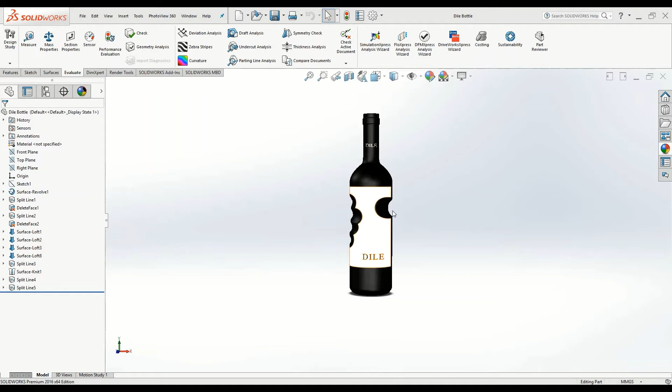Hello everybody, in this video I'm going to go through the design of this quite interesting wine bottle. Apparently it's called the Dile wine bottle, I'm not sure exactly how to pronounce it, but I came across this in a Facebook group called just SolidWorks Facebook group, and the person posted a picture of the wine bottle and asked how you make the grooves in it. So I didn't see anybody respond with a basic tutorial, so I'll quickly go through it and how you would

create it. So the first step is to just Google the bottle and get a good image. An image like this, for example, would be a good blueprint to start. So you can just right click and save this image to your computer. So then in SolidWorks, I've obviously modeled this already, but I'll go through step by step so you understand the process. So you'll start a new sketch on any plane.

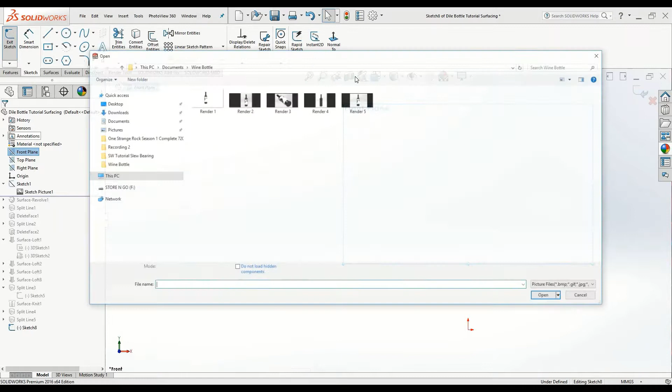And then inside this sketch, you will import an image of the wine bottle. So to do that, I'll just show you quickly. Front plane sketch. So go to Tools, and then Sketch Tools, and Sketch Picture. And then you can bring in the image that you saved to your computer of the wine bottle, and you can scale it and whatnot.

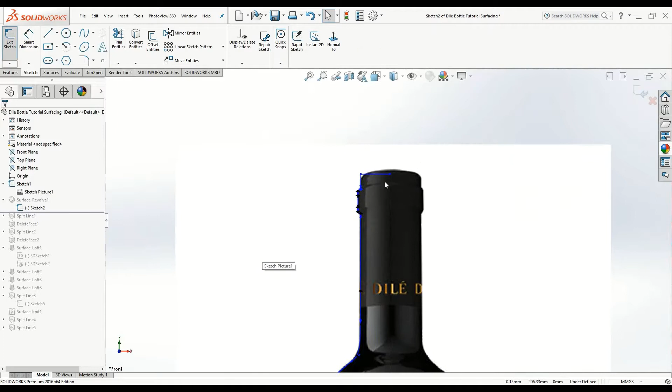So once that step is done, you'll have the image of the bottle in SolidWorks, so it's just a flat two-dimensional image. And the first step I'm going to do is a surface revolve. So I'm going to create a new sketch, and here I've outlined the edge of the bottle on half the edge. And it's important for you to note, I'll just quickly go through that step. So I'll sketch on the same plane that the picture is on.

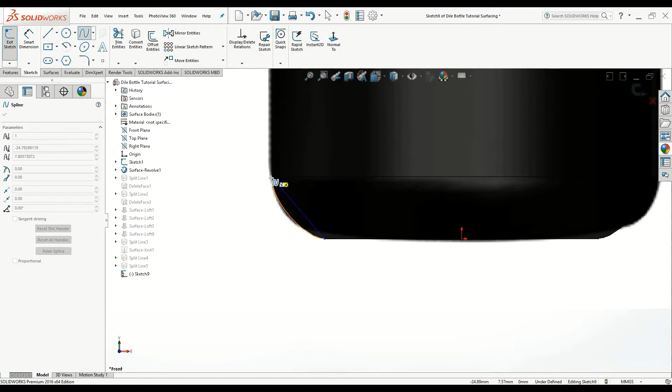And I'm just going to try to use mostly straight lines, but then obviously when we have curved points, we can't use a straight line, so we want to use a spline. So with splines, just click once at the start point, and then once at the end point, and right click and hit select to exit the spline options. And then when you click on the spline, you can see these little arrows that appear.

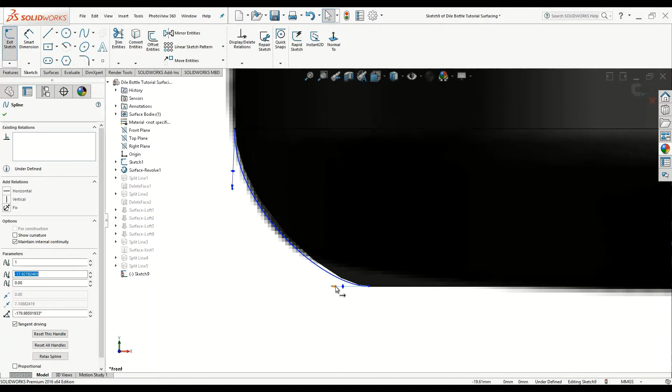So these arrows can be adjusted, not only in terms of angle, but also amplitude. So I'm just going to adjust these arrows to give me the best match with the blueprint. Another point worth mentioning is that I can click these arrows and hit horizontal, or likewise I can hit vertical. And what this means is that the tangency between this spline and this curve is 100% smooth now. So when this surface is revolved, it's going to be a smooth surface with smooth transitions. There's going to be no sharp points.

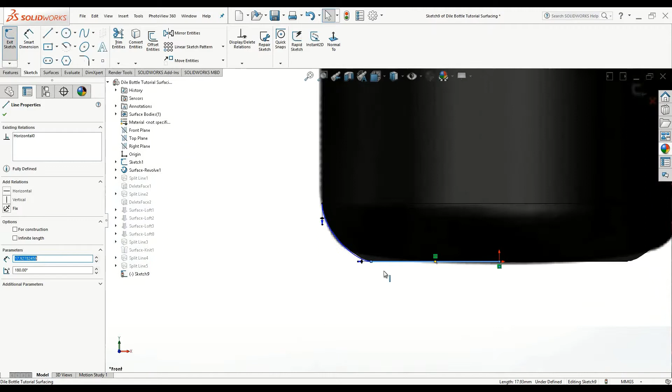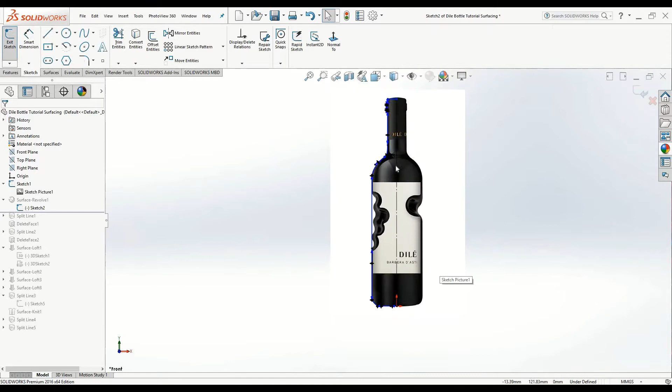So this technique of drawing a spline with 2 points and then manipulating the spline handles is quite important in the surfacing that's going to come later on. So I'll just exit that sketch and quickly delete it. So as you can see with this sketch, I did that whole process going all the way up the bottle, and then I did a surface revolve. So we've got a three-dimensional flat surface of the whole bottle now.

So I'll just quickly state that there is no one perfect way of modeling this bottle because it's an organic shape with advanced surfaces. There's multiple different approaches. I'm just doing a quick approach. I'll explain why it's not 100% perfect and what you would have to do to get it to be a better model. So my approach was to cut out the finger groove sections.

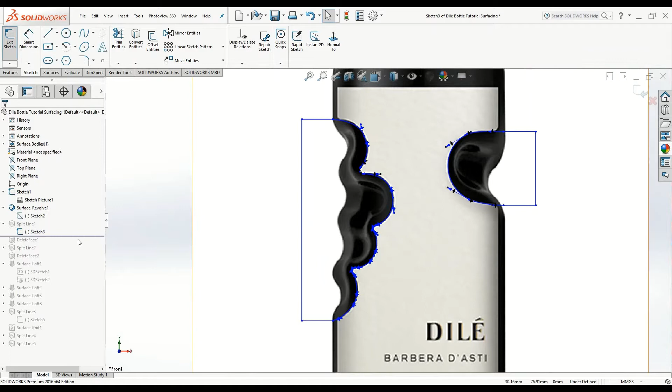So what I did is I hid the surface revolve that I just did, and then I started a new sketch. And what I did here was trace the groove sections where the fingers would sit on the bottle. And then from there, I did that using a split line command. So I'll just quickly show you again how I would do that. So do a sketch on the front plane.

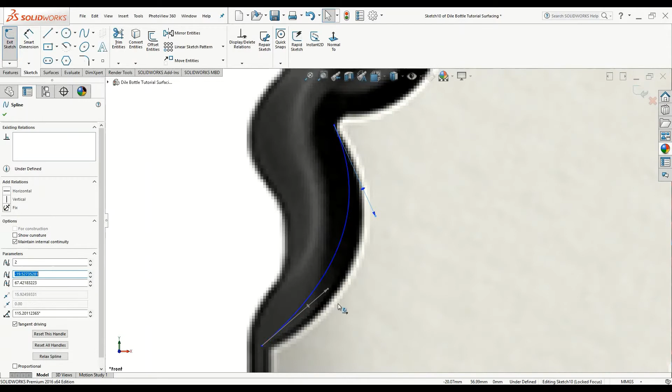I'll draw some splines, manipulate the handles so they match the curvature of the blueprint of the bottle. And I did this essentially the whole way around the bottle, starting up here. I'm not going to do this now because it's going to take too long. I'll just delete that quickly. So once I'm happy with that surface, that sketch, I can go into curves and hit split line.

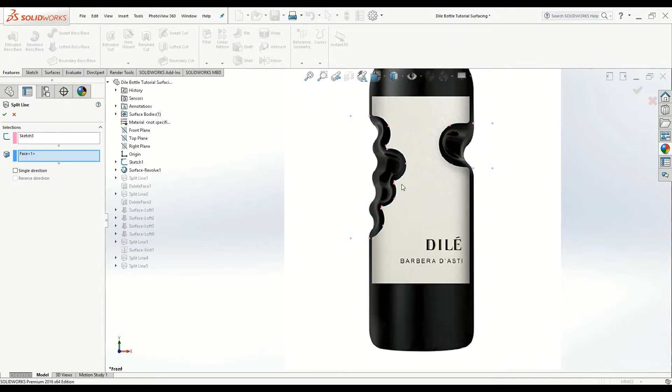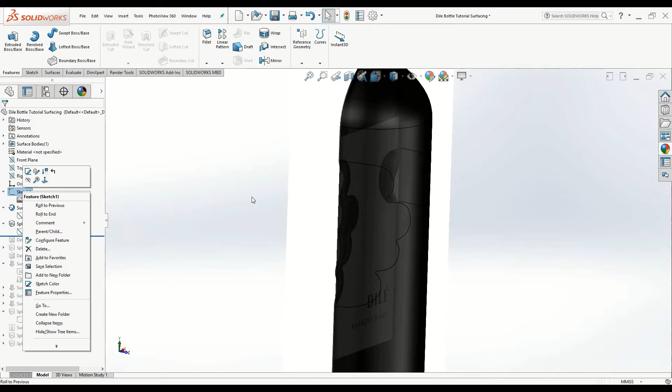The split line feature is going to project the curve I just drew onto the three-dimensional surface. I have that hidden at the moment, so I'll just go back and unhide it. In these processes, you quite often have to hide a step, whether that's part of the model or the image you're working with, just so you have a better view of what you're trying to do.

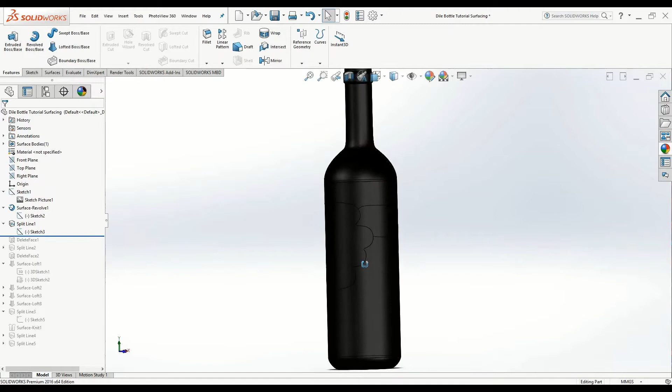Going back into the split line feature, there's the sketch I drew, and I'm projecting that onto the revolved surface of the bottle. I'm just going to hide the image, and when I hit OK, we can see the bottle has been split into multiple different surfaces.

Then I can use the Delete Face command, which will be in the surfacing toolbar. By the way, if you don't have access to this surfacing toolbar, go into Tools and then Customize, and you should see all the ribbon bars become available.

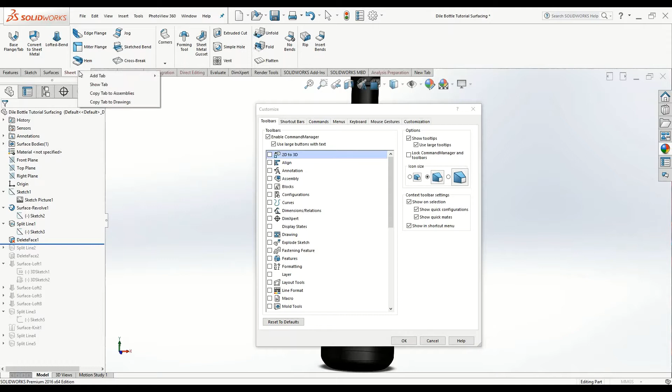For me, sheet metal, weldment, and mold tools become available. If I wanted the sheet metal ribbon to stay, I'd right click it and say Show tab, and now when I exit, sheet metal is available. If I want to get rid of it, go into Customize, Sheet Metal, Hide tab. For some people, the surfaces or render tools may not be visible by default, so you might have to do that step.

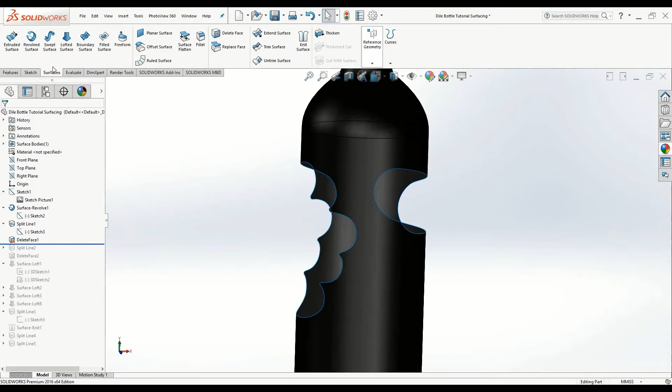What I've done now is use the Delete Face tool on the split line I did earlier. The Delete Face tool is under the Surface toolbar, up here. I'll quickly show you how to do this.

I've done my split line, so SolidWorks now recognizes this as its own section. I'll do Delete Face and simply select the areas I want to cut away. I'm just going to say delete, by itself, because you could do delete and patch, which tries to patch the area with a new flat surface, but I just want to delete these surfaces. Now we can see I've got this interesting shape that's not quite complete.

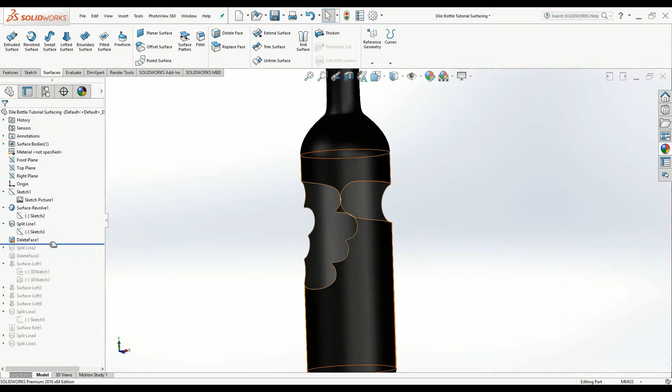The plan in my mind when modeling this was to cut away these sections and then resurface the finger grooves. I also couldn't find a back image of the bottle, so I couldn't find what it looked like on the back. Essentially I just assumed that the area between the thumb and the index finger wrapped around the bottle. That may not be correct, but it's just what I had to assume.

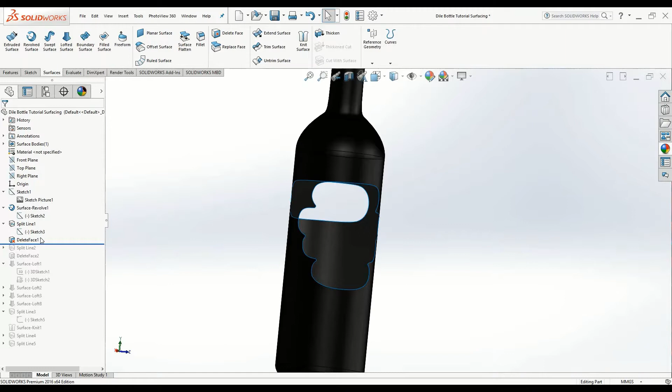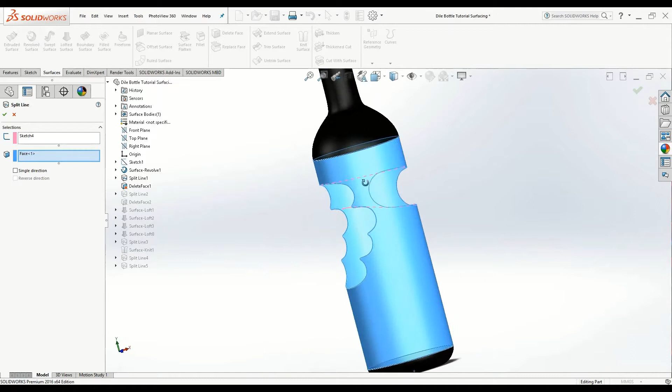So I did another split line sketch and projected that onto the back of the bottle. One point to note is that when you do a split line, by default it will generally project in both directions, forwards and backwards, but I just want it to project in a single direction on the back, so that it only separates the surface into its own segment on the back, because the front of the bottle we want to remain unchanged.

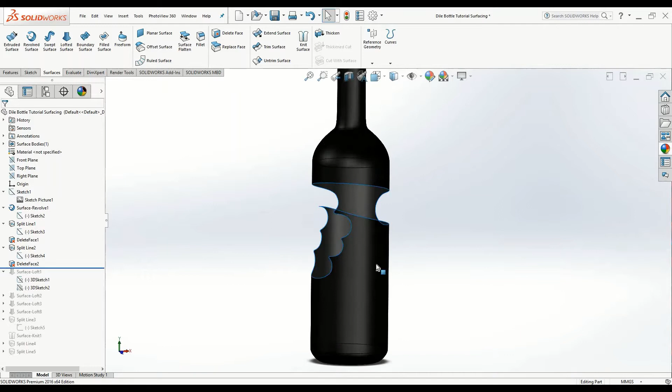Then I simply use the Delete Face tool again to get rid of that section. Now we're at a point where we can start doing our own surfacing to create the grooves in the bottle. I'm not going to go through every step, but I'll show you how to do one and then we'll go from there.

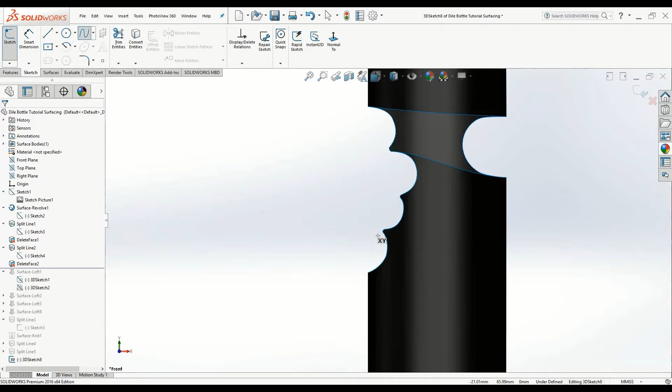If I go into sketch and hit this arrow, I can select the 3D sketch option. I want to use a spline again because I'm going to be drawing curves, not straight lines, and I want to manipulate the curvature with the spline handles. With the spline selected, I'm just going to select a point here, on the bottle, and a point here. Right click, hit select to exit that.

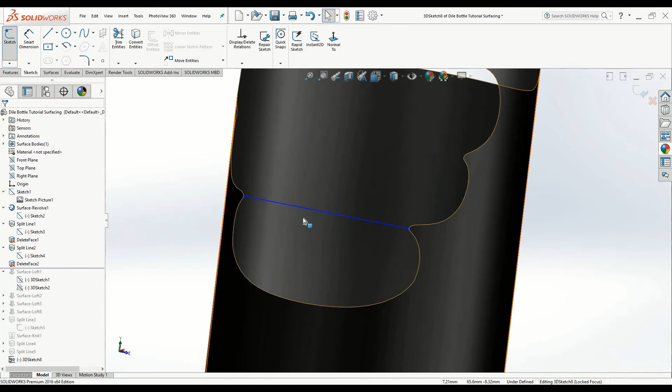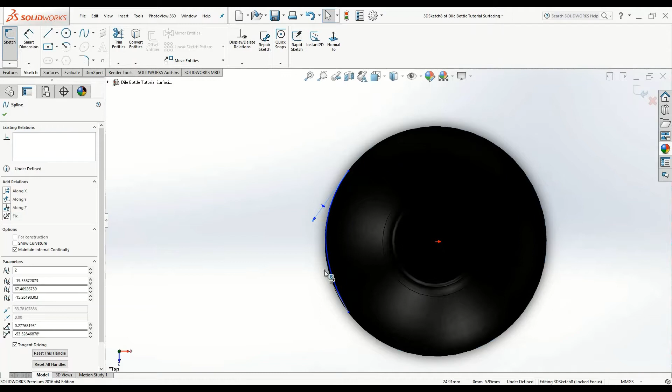So now I have this section here, this kind of loop, which is going to be the smaller subsection surface that I'm going to create. I want to select the spline, and we're going to alternate between our isometric views, front view, side view, top view. In this case I'm going to the top view, and I want this to match essentially the cylindrical shape of the bottle.

Here you just have to try, think, and visualize a bit, and I'm actually going to go back and make the initial blueprint of the bottle visible again. What I'm doing here is trying to create the boundary of the bottle at this point. I'm going to manipulate these spline handles so that this boundary section I'm drawing is as close to the real thing as possible, and in this case this looks quite good.

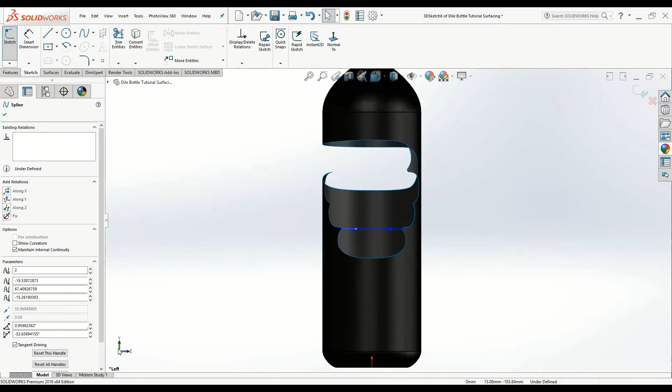So I actually don't have a side view of the bottle. If I wanted to be more accurate, I could try to find a side view, but it's quite alright to just model with one view of this bottle.

It's not the most complicated shape. So here I'm going to press OK to select that, and I'm just going to hide this sketch because it can get in the way when I'm working. So what I want to do here is exit this sketch, because it's good to try keep everything as modular as possible - one spline per sketch.

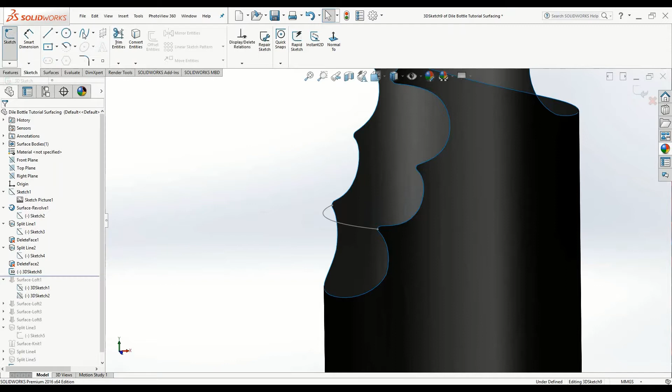I'm going to do another three-dimensional sketch because I want to create a surface between this edge and this edge, but I need to give it some guide curve to follow.

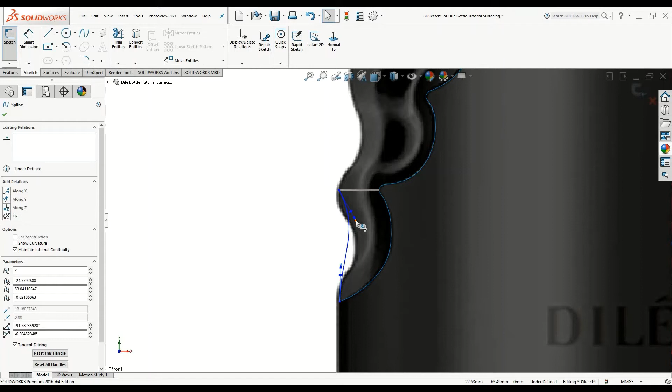If I make the blueprint visible again, we can see that the bottle has a channel, I guess you could call it, where the finger would sit in. So I'm going to draw a guide curve that we're going to use to create our surface.

You can see here, it's difficult for me to get this to follow the shape of the bottle exactly with only a single spline. So I'm going to right click the spline and click insert spline point, put that in the middle, and that's going to give me more control over the spline so I can manipulate it a bit more.

and get it to match the shape of the bottle a bit better. In general, you want to avoid using spline points because they make the splines more complicated, which then makes the surfaces more complicated, which means more things could go wrong. So you want to try keep everything as simple as possible when you're doing this.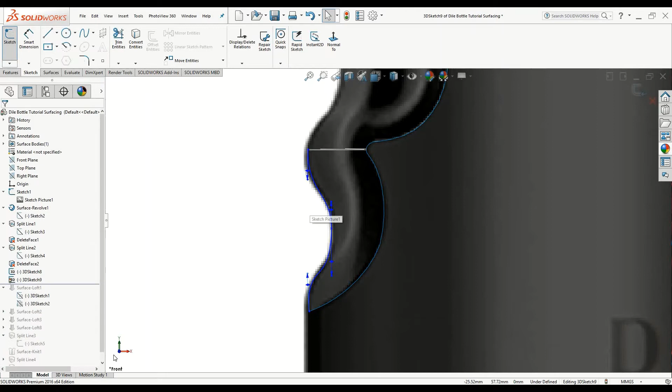So there I've drawn my three-dimensional guide curve, and I'm still going to alternate between my isometric views, because looking at this from the side, the guide curve essentially should just be on one plane. It doesn't have to be absolutely perfect, but the longer you take with this, the better it will be.

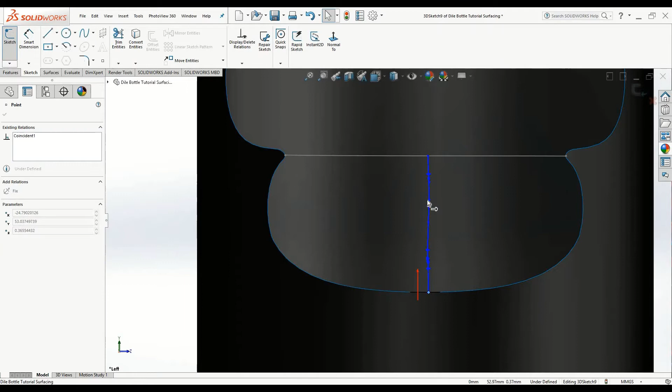So there we go, I'm going to exit this sketch now. So now I can actually create my first surface. I'm going to go into the surfacing ribbon, and use a lofted surface for this section.

To be honest, most of the surfacing options are fairly similar - lofted surface, boundary surface, they're quite similar, so I could use either of those two. I'll just quickly demonstrate the lofted surface process.

So here we have two boxes, with the profiles and guide curves. The profiles are going to be, imagine if we had a square or any kind of shape, opposing edges, and these green points specify the starting point, so we want them to be on the same level, if that makes sense.

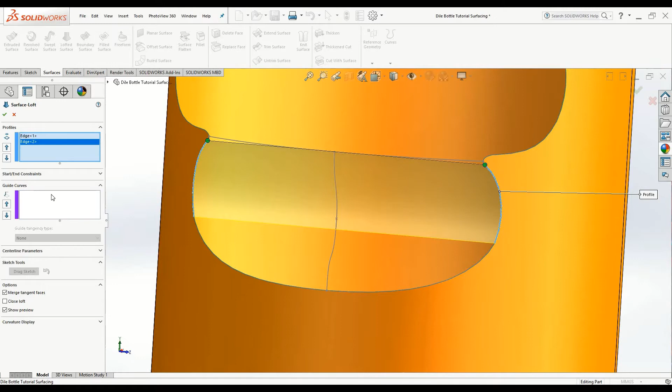So here I've set my guide curves, but we can actually see that this curve doesn't meet up with this point exactly. Because I'm doing this quickly, I'm taking shortcuts, trying to model the whole thing in large sections. But really, if you were taking your time and doing this as close to 100% accuracy as you could be, you would split these up into smaller surfaces as you go along. I'll explain that more in a bit.

So I'm just going to clear this section. An important note with this is that good practice is to right click the box and then use the selection manager, which brings up this little box. And I'm on select group.

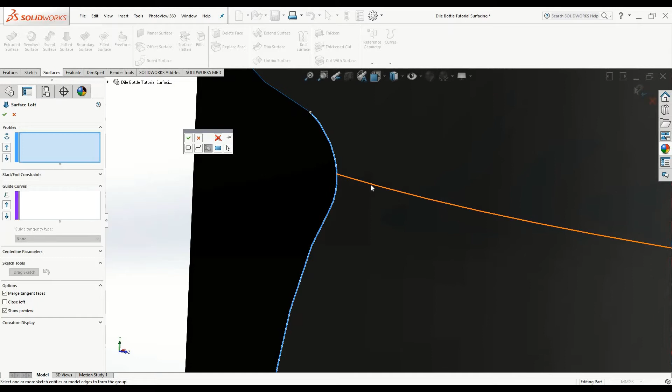So what I'm going to do is select this edge, but I also have to select this other edge so that we go past our guide curve. And then I'm going to hit OK. I'll just quickly highlight the other areas so you can see, but I've selected those two, and then I'm going to hit OK. And now it's selected both of those as an open group.

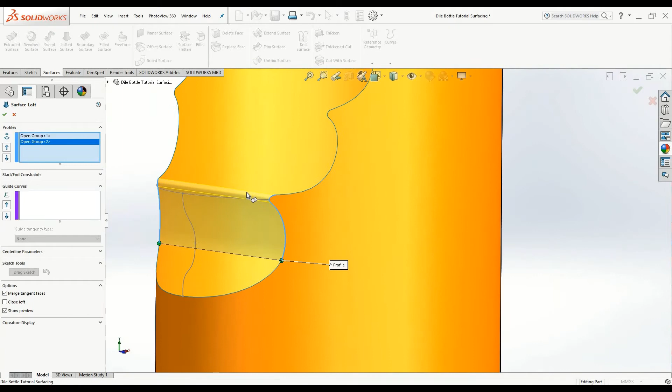So I'm going to repeat the process, open up the selection manager, select these two curves, and now we can see we've got a surface. The yellow is the surface preview, a surface forming between our profiles. And here I'm going to put in my guide curves.

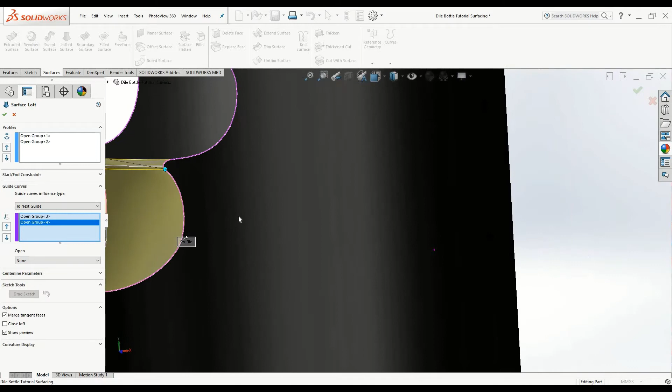One guide curve is going to be the first one we drew - select that. And then a new guide curve is this bottom one. So we can see this is starting to follow everything, but I actually haven't selected that additional sketch I drew.

And we can see that the surface we're getting isn't the exact shape we want. We want more of a kind of indentation in the bottle here.

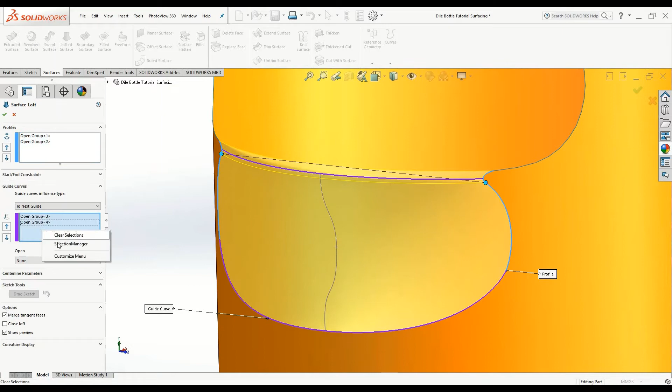So if I were to try select this curve now, it's actually not going to work because I've put it in the wrong spot. Because this curve is essentially parallel to our start and end ones, we actually want to put it grouped up with them.

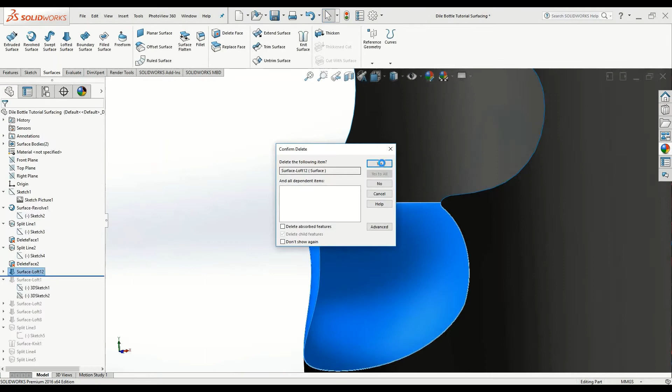Okay, apologies, I was having some difficulty getting that surface to build properly, and I realized my mistake. Unfortunately, SolidWorks isn't the most powerful CAD modeling software for working with surfaces, so you can make small mistakes and it won't work.

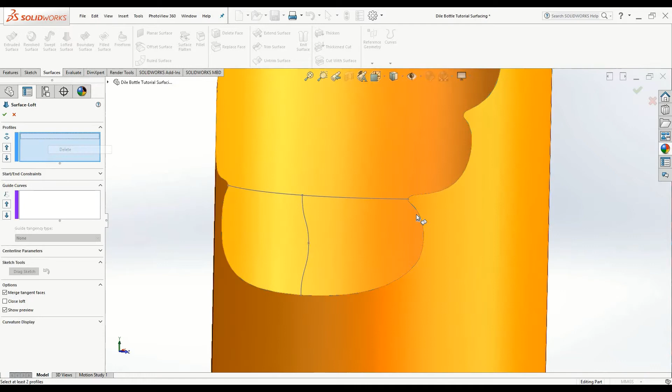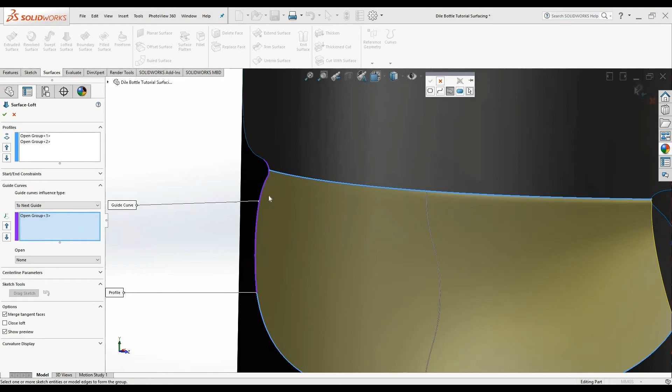Before, I was trying to use this edge and this edge over here as the profiles to start from, but I found that wasn't working. So instead I selected that edge and this bottom edge to create the surface, and then the guide curves - again using the selection manager to select multiple groups of curves if needed. Selecting it this way does work for me. So there we've created our first surface.

I did this process up the whole bottle, so I'll just delete this since I've already done it. So here we have our first surface loft feature, and this could have been done with the boundary surface, which is a similar kind of tool. You can experiment with that in your own time if you wish.

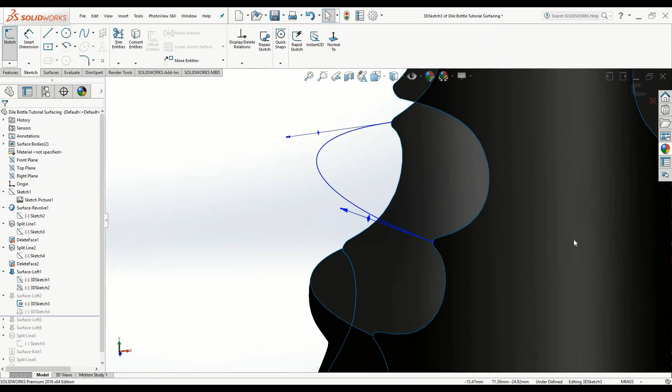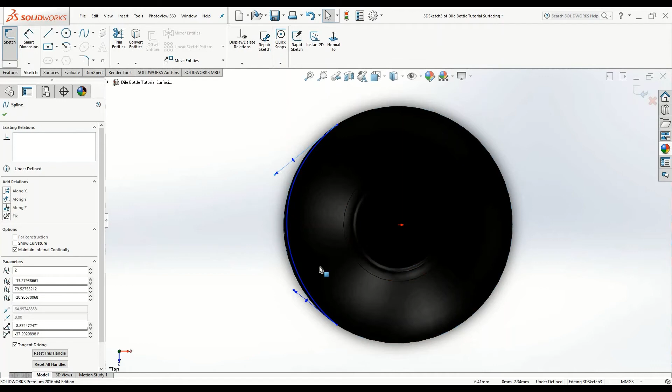Here's the second surface feature we created. I'll show you the sketches I did - I created another three-dimensional sketch between the top peaks of the second finger groove. While doing this, I have the blueprint of the bottle visible, so I can see this is roughly matching the outline. From the top view, we're pretty close to matching the cylindrical profile. You're never going to model this 100% accurate since you're working off a picture of a three-dimensional object, but alternating between views gets it reasonably good.

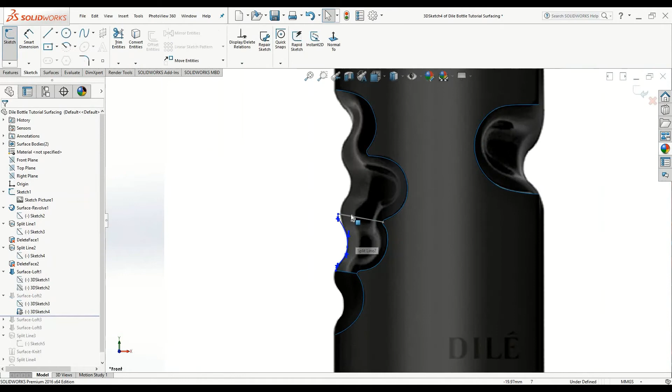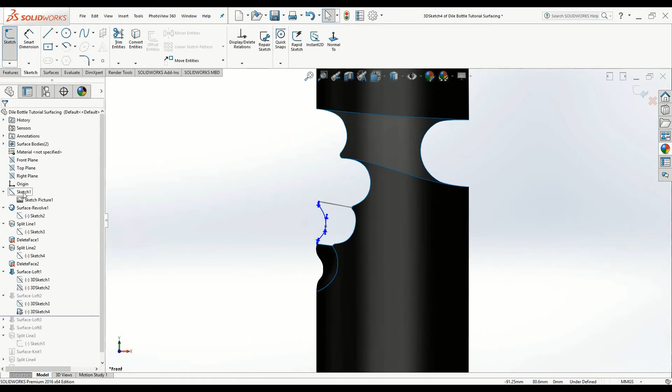So I'll do this and exit that, then show you the additional sketch. Likewise before, I created a guide curve, which was a spline. In this case I had to add another spline point, and that guide curve spline again follows the blueprint, the outer perimeter of the bottle. So quite often you have to hide and re-show the blueprint when you're working with surfacing.

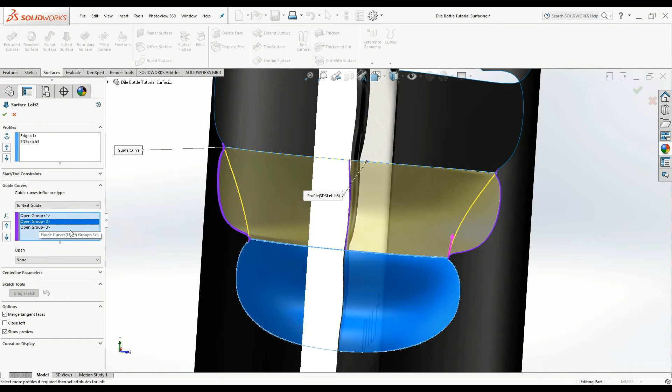Then I created the surface loft again. We can see here my profiles are this bottom edge and this top edge, and these three purple lines are the guide curves I used.

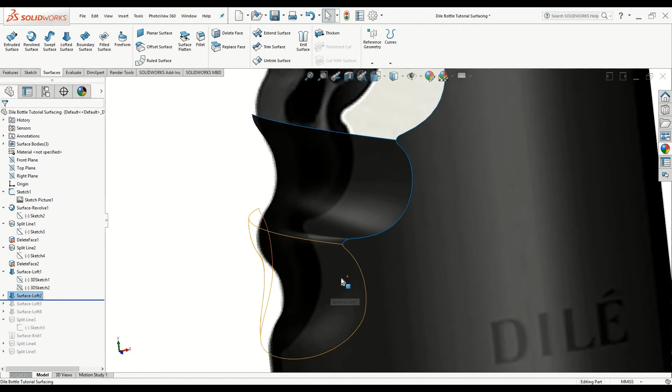Within surfacing, there are also more features you can use to alter the quality and characteristics of the surface - I'm not going to go into that now, it's more of an advanced topic. But I will quickly mention that because I was doing this quickly, I was modeling large sections in one go. When you're modeling surfaces, you want to try to keep them as small and simple as possible.

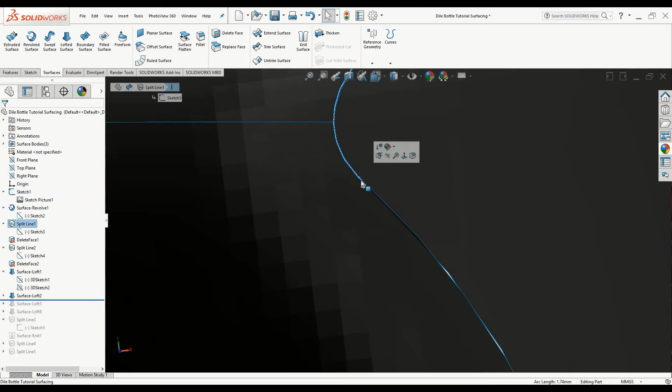For example, if I were doing this more accurately, I would model this surface only up to this point, where there's a point of inflection and the gradient of the curve changes - around here. Instead I got lazy and modeled it around here, and then this one from here all the way up to here. But really, these two surfaces should be three surfaces - we should have a thin surface covering this section, going down there, and around there.

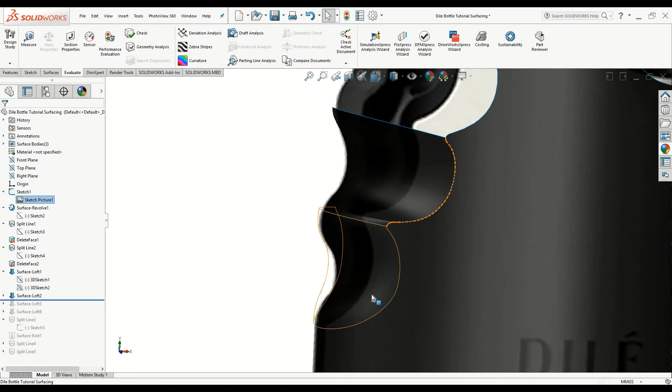To demonstrate why that should be the case, if I turn on these zebra stripes, we can see there's a bit of a defect in the surface, and we can also see it if we turn the curvature on. We can see a sharp red point, which means this area doesn't have a smooth transition, and that's because I tried to get the surface to do too much when I should just be modeling smaller surfaces and combining them together.

But just for the purpose of this tutorial, this is more than fine. So I went through again and did another surface loft for this finger groove up here, same process as before, and then I did the same for the last step.

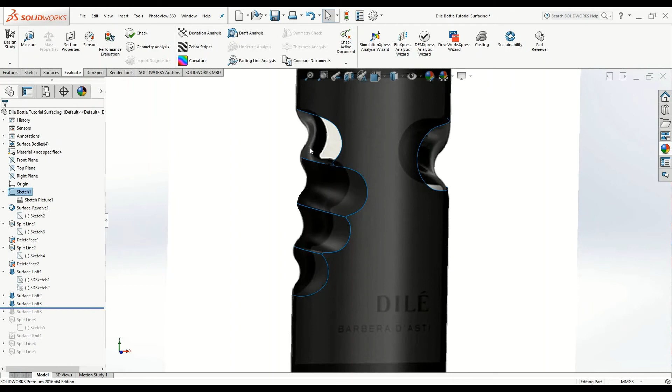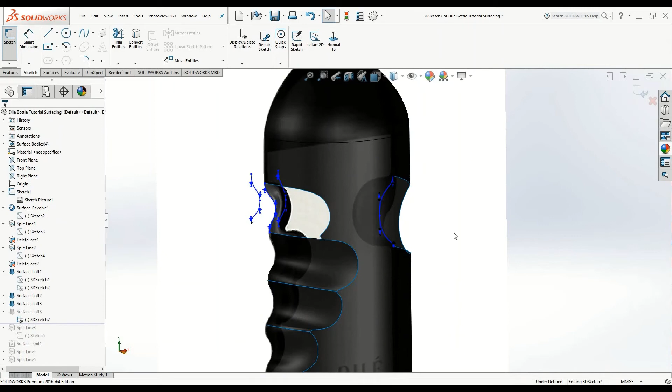So the last step, the thumb groove, is actually connected to the index finger groove. This is a surface wrapping around the whole bottle, so it's a bit more complicated. What I had to do was draw multiple guide curves. If I re-show the blueprint, this guide curve I got to match the profile as best as possible from that perspective. These ones on the side, since I don't have a side image, I just have to estimate what the cross-section at this point might be.

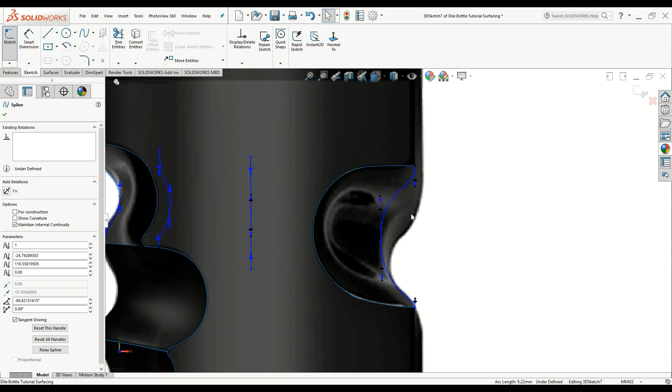At this point, I also decided to slightly alter the shape of the bottle because I wasn't getting good results perfectly following this image - an image could be slightly distorted, so sometimes you just have to use your judgment and know when to make changes.

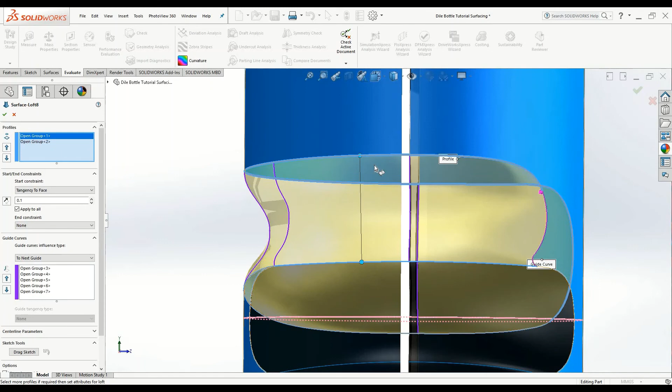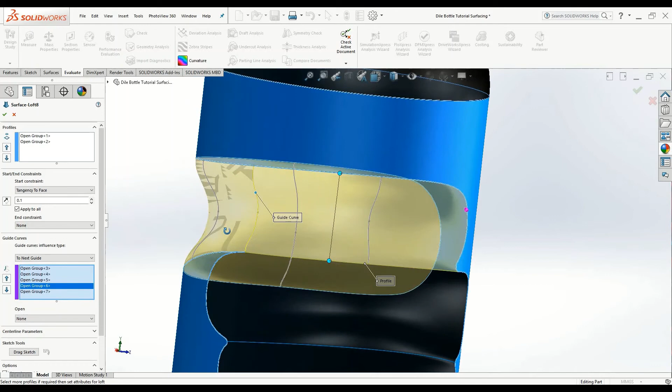The process for this part was essentially the same, so I still used the surface loft feature. I selected the top part of the cutout as the first profile, and the lower part of the cutout as the second profile, along with all these purple guide curves. It's probably easier if I hide this.

All these purple guide curves were used to guide the surface shape as we're wrapping around the bottle. If I didn't have these guide curves, it would be more of a flat surface, and we wouldn't preserve that kind of indentation for the fingers. Again, this isn't a 100% accurate way to do it. If I wanted to do it better, I would break this down into smaller steps, but it can take quite a long time to model surfaces perfectly accurately.

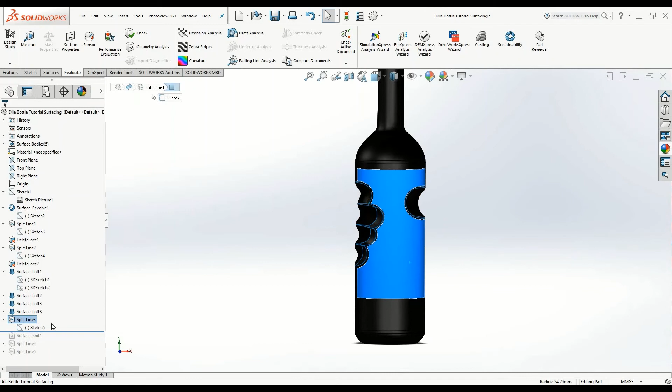So from here, we have the bottle, and it's looking all right, reasonably good. Essentially we just want to finish it up with perhaps the front label. To do the front label is quite easy.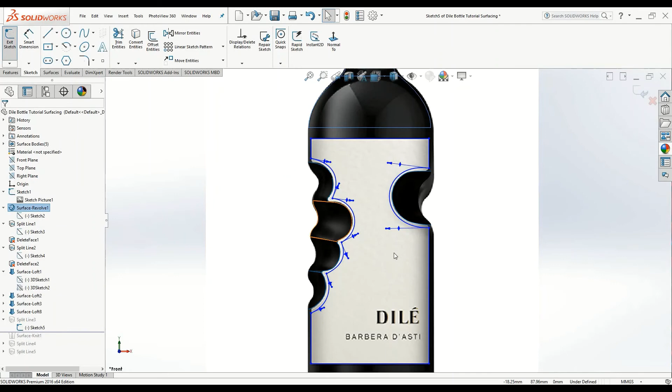You just create a sketch on, in this case, the front plane. So what I'm doing here is showing the blueprint, and I'll hide the bottle. Here I'm drawing the outline of the label. Keep in mind, this is just a drawing on a two-dimensional surface.

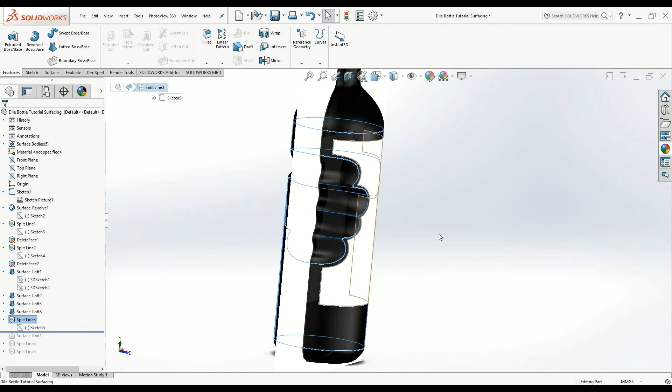Then what I'm going to do is use the split line feature, which is under curves, like we used before. That's going to project the two-dimensional drawing we just drew onto this three-dimensional surface, and from there it creates a segmentation of that surface.

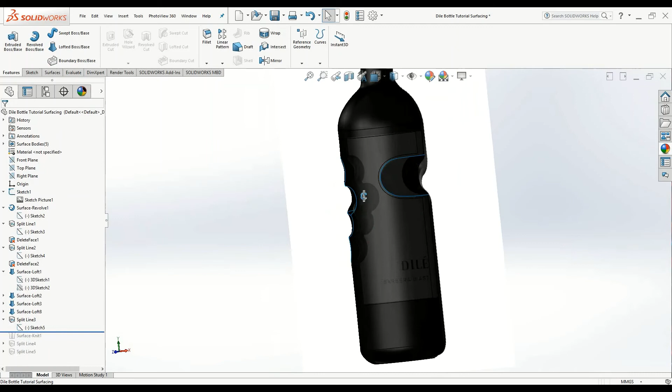I've simply put an appearance on there. So if I copy the appearance of the rest of the bottle, I now have the option to just change this surface face. Essentially, once I got to this step, I selected appearance and added it just to this surface face to get this result.

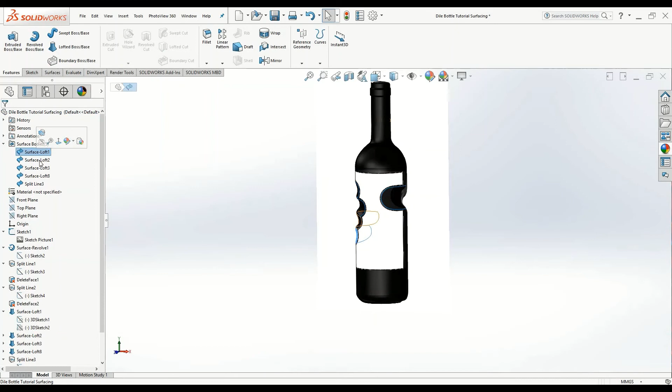Now from here, one of the last steps to do is a surface knit. Before this step, if I look at the surface bodies, we've got multiple surface bodies - the starting bottle and all the cutouts for the finger grooves. If I select them all, holding down Control, and go into surfaces, I can hit knit surface, and I'm actually going to hit create solid and merge entities.

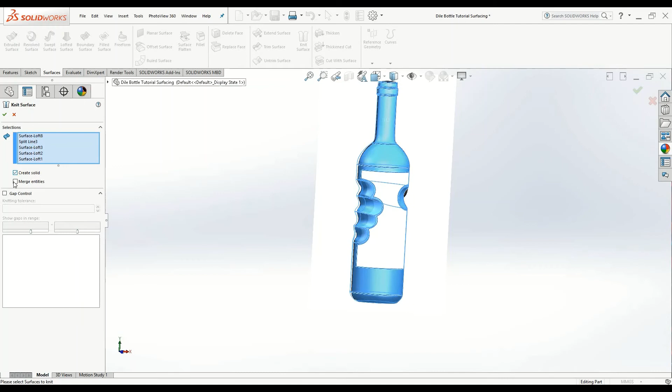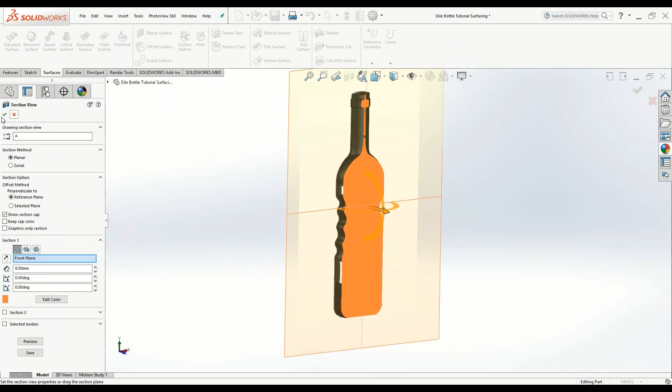What this does is knit the whole thing together, creating a single solid body now instead of multiple surfaces. Looking at that from a cross-sectional point of view, we can see that this is a solid body. As I'm going through, I can see that we're cutting into something solid here. But before that step, if I did a cross-sectional view, there's nothing solid that we're cutting into - it's just a flat kind of surface body with no thickness.

So just for visual purposes, that's not necessary, but if you're going to actually do something with this model, like maybe manufacture it, you would need to make it a solid body.

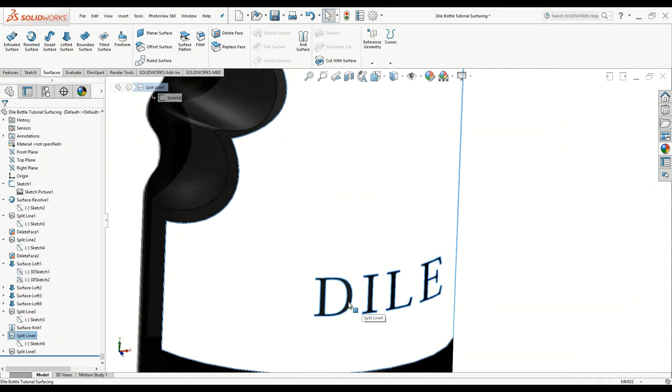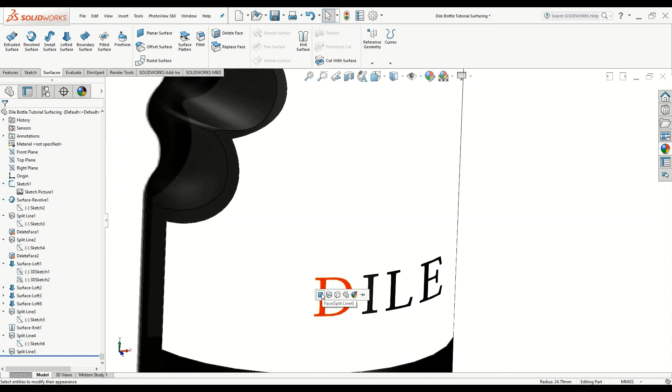The last two steps were simply some text, some labeling. Again, I did a sketch on the flat plane and used the split line feature to segment this into new surfaces. Once I've done that, I can use appearances on just the individual surfaces. For example, if I wanted the Dile logo to be sprayed in a different color, I could drag over this red, drop it on there, and select the surface - and there we go.

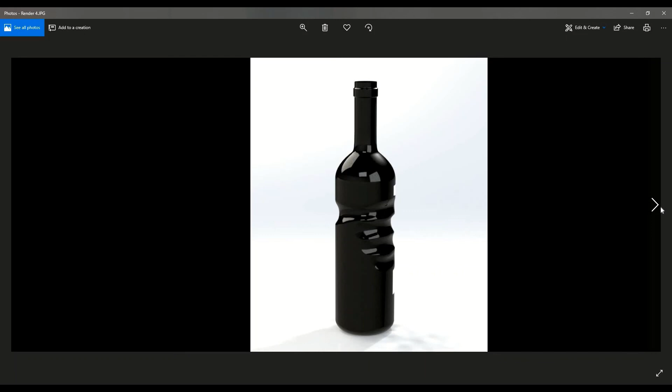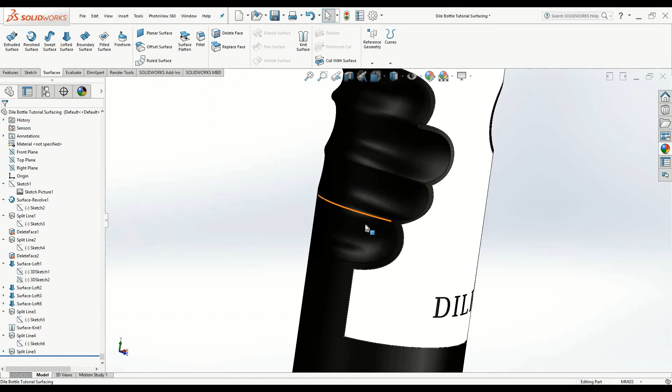To really perfect the quality of this, you would take more steps with it. You would partition these into smaller sections, because the mental process when you're surfacing is quite important. Knowing how to break up different things into smaller manageable sections is very important, and that comes with practice and experience. So this is actually a very good model to practice surfacing on. I'd recommend people just have their own attempts at this.